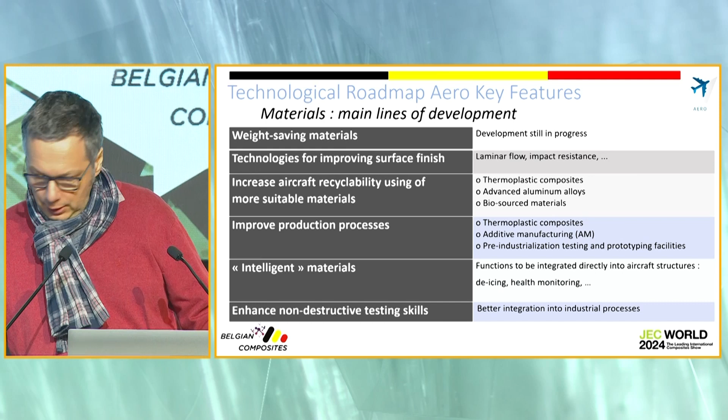The development of the following technologies will be taken into consideration. This list is non-exhaustive. First one, thermoplastic composites.

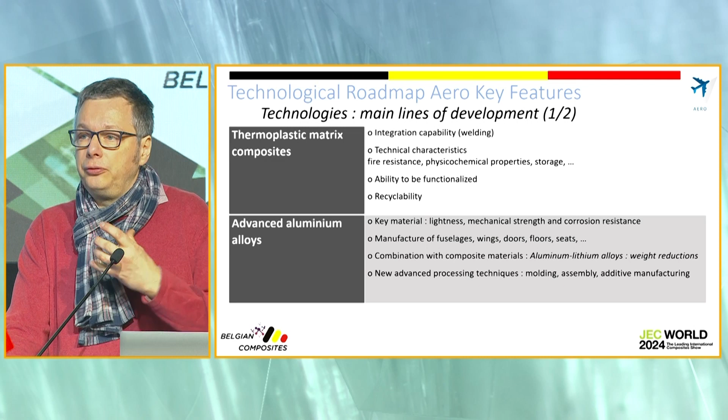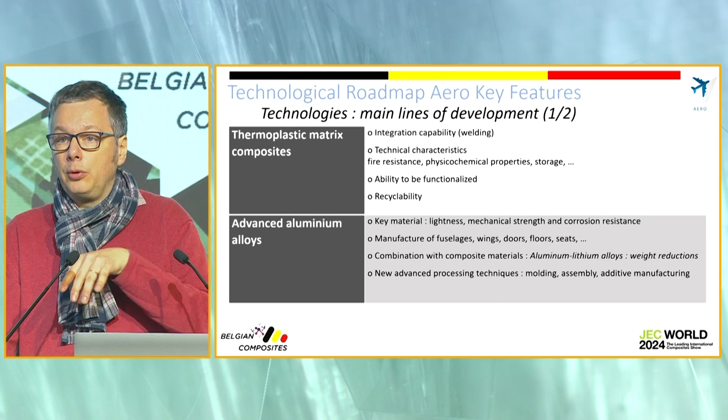The use of thermoplastic composites in the new generation aircraft should offer the same durability and strength as aluminum, while reducing the recurring cost of fuselage compared with the use of conventional thermoset composites. The key advantages of thermoplastic over thermoset composite are listed here, and further development should enable us to take advantage of the specific qualities of these materials and spread them more widely in the aircraft of the future.

Second, advanced alloys, lightweight, corrosion resistance, and mechanical strength appear to be a key material in the aerospace industry. New advanced processing techniques will also help meet the needs of the next generation of aircraft.

The last one is additive manufacturing. In the aerospace sector, additive manufacturing processes can help meet several industrial challenges. However, the deployment of this technology is slower than initially anticipated, so further development will be needed to reduce the limiting factors of additive manufacturing.

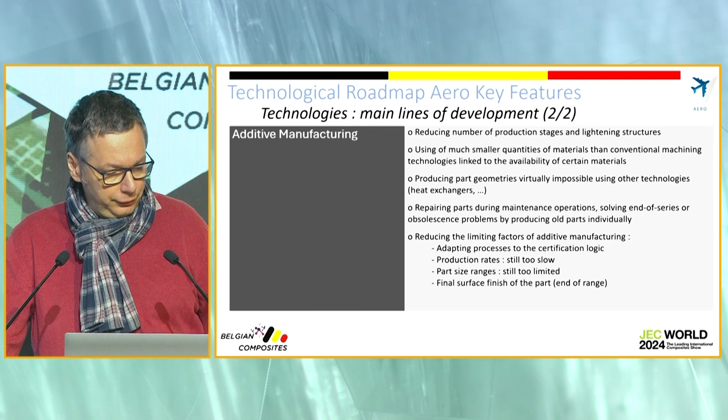I would like to speak about the WINGS project. WINGS is a partnership innovation technological project. 21 partners have joined the R&D effort around the ecological and digital transition to actively contribute to the European Green Deal. Work packages 1, 2, and 4 are about the roadmap.

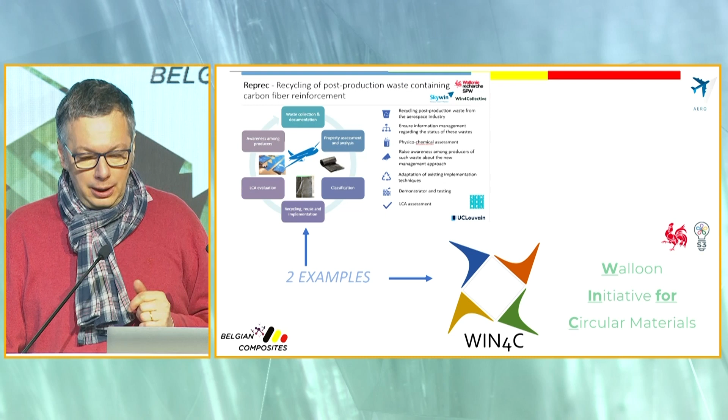Finally, I want to speak briefly about two current projects, Win4C and REPREC, which you see here. I'll stay for further information at the Skywin stand. Thank you.

Thank you very much, Stefan and Jan, for this introduction to the Belgian ecosystem. We now come to the main block of the presentation of the Belgian on Stage session. For this, I have to call on stage 7 people.

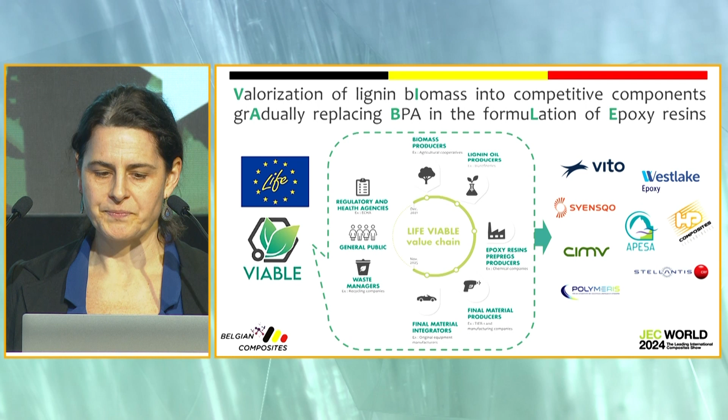It's a growing market, and we see a need for more sustainable products, because the current bisphenol used in these epoxies is derived from fossil resources. It's a big production globally, up to 10 million tons, and an essential component in this formulation because you need the strength in these materials. But there are some regulatory and health issues related to it for specific applications, so to be ahead of it, we are looking into replacements for bisphenol which are also safer, next to bio-based, resulting in a lower footprint.

So the challenge is to make it more sustainable. That's why we look to bio-based materials, and also safer alternatives.

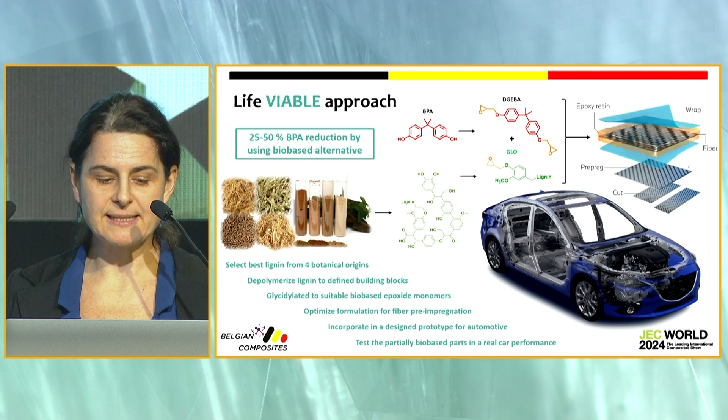The lignin is then depolymerized to make it a more handleable chemical, because you need a defined chemical to introduce into these epoxies. Then a modification is done to introduce it into the epoxy resin, which is further formulated into a pre-preg and then into a prototype for automotive.

You can see the picture on the right side, where this is being developed for two types of components: one structural and one aesthetic.

How do we do this, making this bisphenol substitute? We look to lignin as a component, and we developed it from lab to pilot scale to be able to deliver enough material, because the final aim of this project is to deliver up to 300 kilos of epoxy resins. If that works, we have a validation at the pilot level.

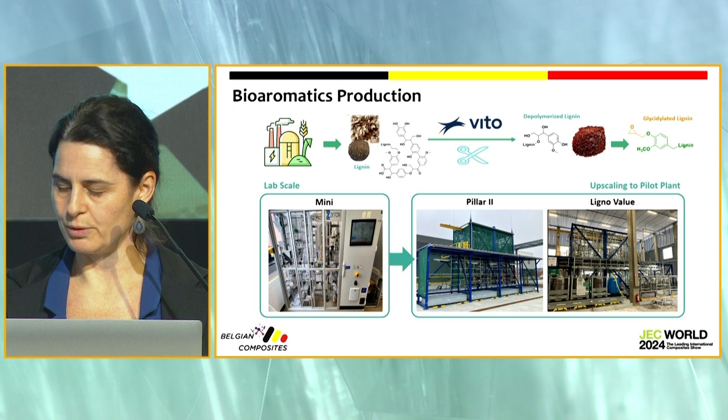That could be the go-ahead to move into bigger demo production. So we started from lab and moved into pilot scale, where we have two units able to produce up to a kilo per hour of this depolymerized lignin, which is then further modified to be used as a bisphenol replacement.

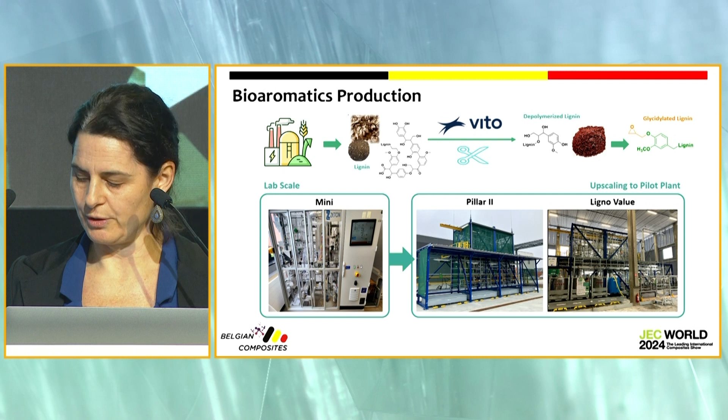The future perspective and potential of our development: we are currently delivering the replacement to our partners who are formulating it into materials, and this is how we gradually build it over the value chain.

So is it a bio-based alternative that's economically viable as well? Is it available, meaning can you rely on different providers? Is the alternative safer? That's also part of our LIFE project, to really look into the toxicity aspects.

Is the upscaling of the process reliable and reproducible? Can we deliver quantities which are okay in terms of time? And does it not affect the material performance? Because in the end, that's what you want - a replacement which ensures that the performance of your material stays the same. Thank you very much.

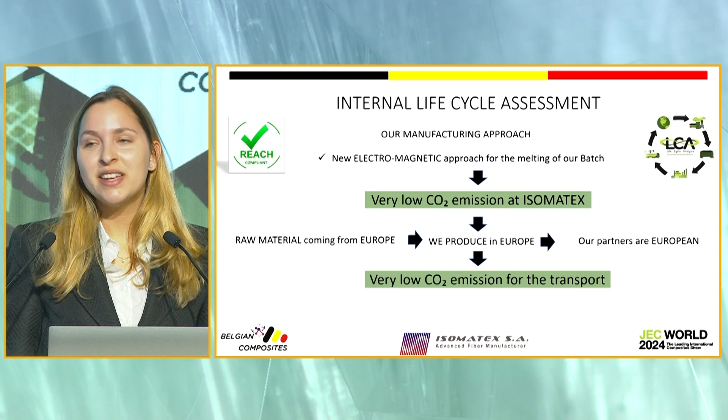Due to the fact that our industry and factory are quite modern, we made the choice at a very early stage to choose sustainable and renewable energy as a key aspect of the creation of our company. So we have 100% control of our LCA internally, which I'm really proud of. We made some different approaches in terms of our manufacturing process, firstly by choosing electromagnetism to heat up our furnaces, but also the fact that all our raw materials come from Europe, more precisely Belgium and Germany. We are a monosite, so everything is located in Belgium, near Namur. We have our R&D, production, quality lab, etc.

Our partners are also European, because we are not only producing bobbins, but also woven fabrics, semi-finished products, pre-preg, woven fabrics, hybrids, needle punch felt, etc. So we have a large list of European subcontractors that we've trusted for more than a decade or so. These aspects are obviously chosen for a reason: to reduce CO2 emissions from transport and be as green as possible.

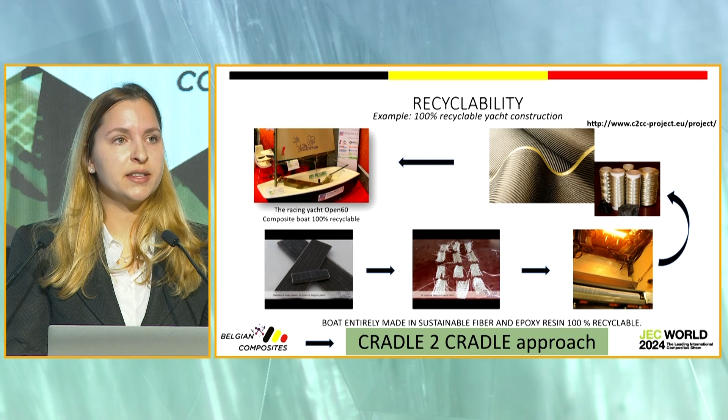To showcase the recyclability of our fiber, I chose to present an interesting project we did two or three years ago: the recycling of a boat that was displayed at JEC a few years ago, and now is not seeable anymore because we have recycled it entirely. We now really control the process of recyclability in-house, which is a very important aspect of our manufacturing approach. We do solvolysis and pyrolysis, meaning we put the fiber back in our oven. We can do that only because we have a very strict quality control process throughout the entire life of the manufacturing process. We are able to do that because we control everything.

Obviously, we are an aerospace grade fiber, so we are in aerospace. But not only that - we are also in naval and marine industries, sports, ballistics, defense, safety, mobility, and renewable energy. All these applications are really made to enhance the security of all users, from a car to a plane, to a helicopter, to a yacht, etc.

So I would like to invite you to continue this conversation with me if you have any questions. Our booth is located in Hall 5, M108. This is the number of the booth, and I will be very happy to meet you there. Thank you very much.

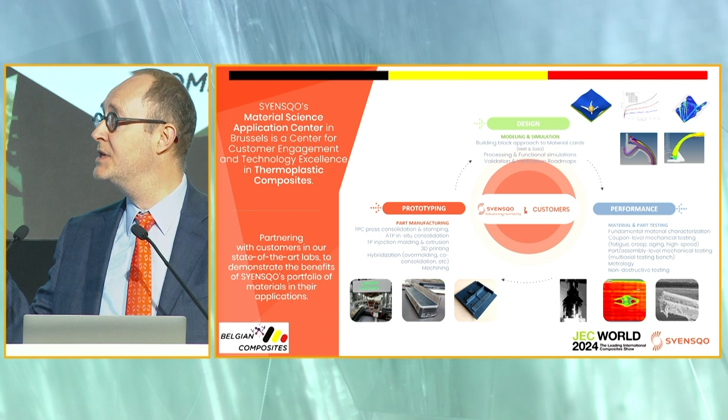Within the thermoplastic composite platform, I'm leading an R&D team called MSAC, which stands for Material Science Application Center. It's based in Brussels, in the center of Europe, and has a dual purpose of being both a customer engagement center and a center of technology excellence in thermoplastic composites.

Being a customer engagement center means we are not working behind closed doors. We want to have open access to our labs and capabilities for our customers. We want designers and material engineers to come and experiment with us on our equipment, or leverage our materials to develop new products.

The second pillar is called performance, where we do a lot of testing, both fundamental at the specimen level with tensile bars, for instance, to understand the behavior of the materials, but also part testing, so assemblies, where we can test complex parts at a big scale.

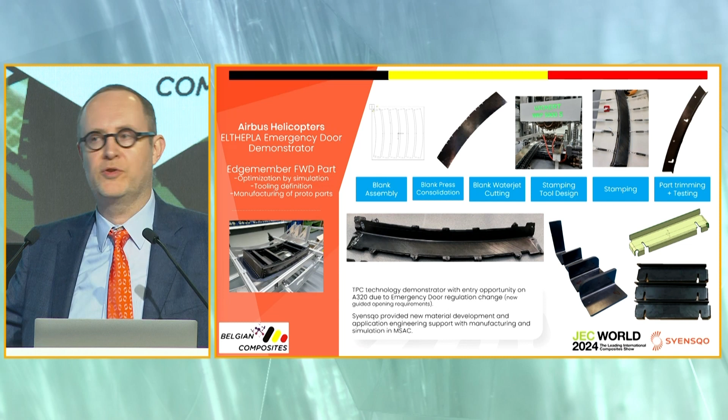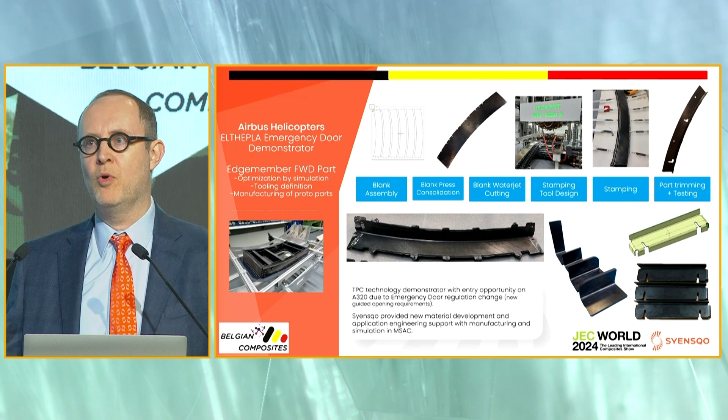What we did within MSAC was first run a lot of simulation to define the tooling to achieve a zero defect part, predicting wrinkles and every kind of defect you can have when processing our thermoplastic composite, in this case APC material. Based on this simulation, we defined the tooling and worked with a company in Belgium to get the actual physical tools. Those tools were then used in MSAC, still in Brussels, to manufacture the structural members, which were machined at Jet Techniques in Belgium and then shipped to Airbus for assembly of prototype doors.

You can see a small picture on the left side of one of the doors that was assembled. If you're interested to see it and touch it, it's also shown at the Syensqo booth in Hall 5. It was a very interesting project in the sense that all the pillars within MSAC aligned to deliver on the final goal, and it's a nice experience to be able to feel the parts at the end of the whole process.

The second project is called Compost. It's sponsored by the Brussels region, and we have several partners, some of whom are here today: the Vrije Universiteit in Brussels, Université Libre de Bruxelles, and UC Louvain as academic partners. We are sponsored, as I said, by Innoviris, the Brussels region.

This project was born from a kind of strange feeling. We were unsatisfied with the answer we provided to our customers around recyclability. What are you doing with your waste? The tape that you waste, maybe the scraps around the blanks after machining, what are you doing with them? The answer was always, well, you can compound them and get a nice engineering compound. But we never did it ourselves. We worked with partners and so on. We knew it could be done.

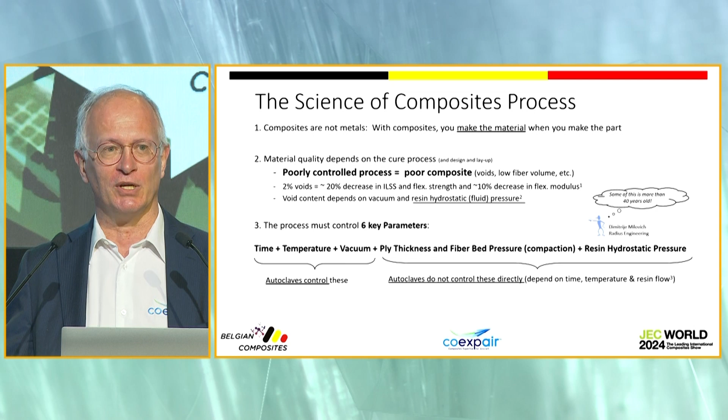The 6 key parameters Dimitrije likes to remind us of: time, temperature, and vacuum. The autoclave controls these parameters. But the other parameters, the ply thickness, really what will be the thickness of your part, the fiber bed pressure, the pressure on the fiber, on the laminate, and the resin hydrostatic pressure, the pressure in the resin, have to be controlled independently. And that does not work in an autoclave, and it will never work.

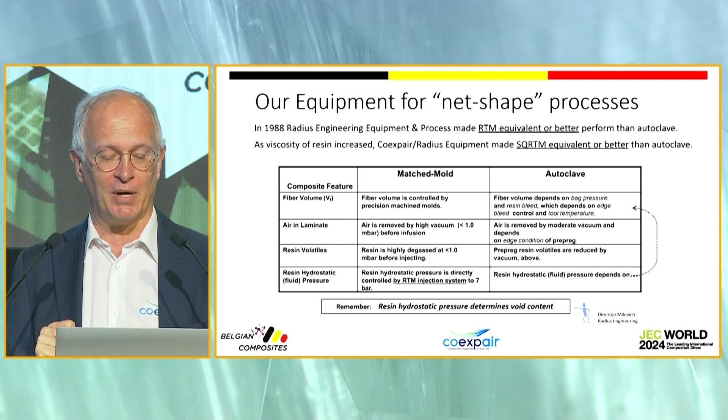So we went together to net shape process. We are in the RTM business, or SQRTM, not because we are fond of RTM, but because we want to be in control of the key parameters of the process. With a closed mold, the fiber bed pressure is controlled by the pressure of the press. The volume fraction is directly controlled because you have a 2-side mold, so the gap and the thickness of the part is frozen. The resin volatile, we can highly degas the resin and we can control the vacuum in the mold. So, compared to autoclave, we want to be in control of the key parameters that the scientists say you have to control if you want to make a good composite part.

And from these basics, we developed the right equipment to do it. That's why 30 years ago, Dimitrije and Radius Engineering invented a piston to control the pressure on the laminate and to inject resin, not a pressure pot.

And behind the science of the process, there is the science of the equipment. Today, we are the largest supplier of RTM equipment to the aerospace business, with hundreds of equipment in production only in aerospace for highly intensive production.

As an example, we propose mold in aluminum for high production rate. Why can we propose that? Because we manage the CTE mismatch between aluminum and carbon fiber.

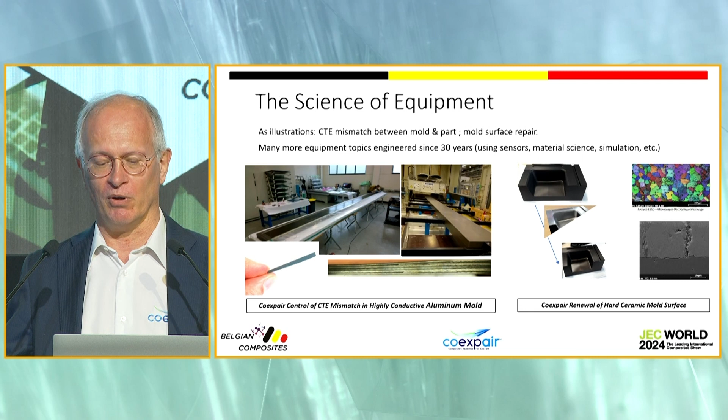And the durability, you need to repair your mold. I just illustrate here, you have mold samples. We remove the material, the surface treatment, and we put it back. It's hard anodization. So we have solutions not only to provide very large mold in aluminum, but also to repair and provide maintenance. And we work with universities for 15 years, understanding what is cracks in anodization, what is the microscopic structure.

So all our equipment is based on science. We want to know every detail. What do we do with that?

A first game changer, the A320 RTM spoiler. Spirit Aerosystem contracted us to develop a new version of the air brakes of the 320. There are 10 air brakes per aircraft. At 60 aircraft per month, it makes 600 parts per month. It was moved to Malaysia in 2006, from Scotland to Malaysia to cut the cost.

Spirit came to us 5 years ago. We imagined a new solution, a new architecture, and together we raised the technology readiness level and the manufacturing readiness level in our shop at Coexpair. It's dedicated to that. We don't do serial production, but we mature the technology and the manufacturing at the same time. So in less than 1 year, we proposed the spoiler, we developed the spoiler.

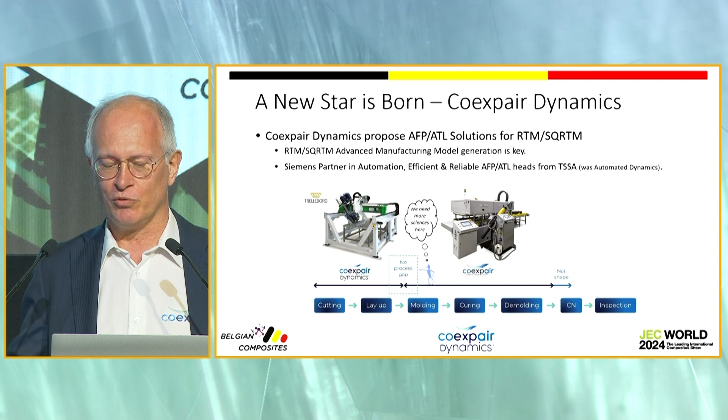So you're welcome to come to our booth, and I will be very happy to answer your questions.

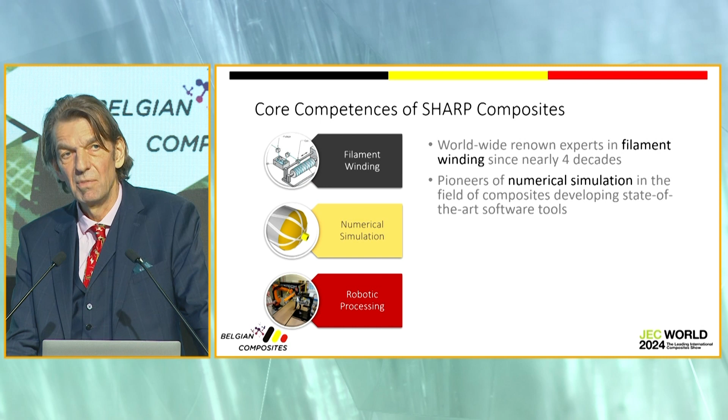It's what we've done for four decades. Numerical simulation is a key element of the technology to really be able to assess the performance of the tanks, and obviously also robotic production equipment.

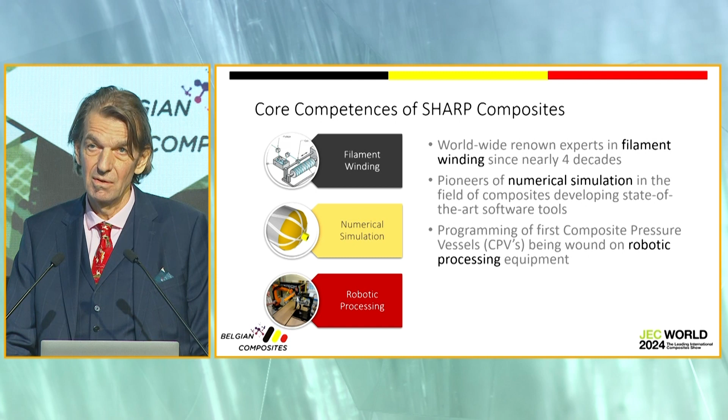Producing those tanks really requires high productivity to fulfill the requirements of the automotive industry, and we're extremely well connected in the network of hydrogen worldwide.

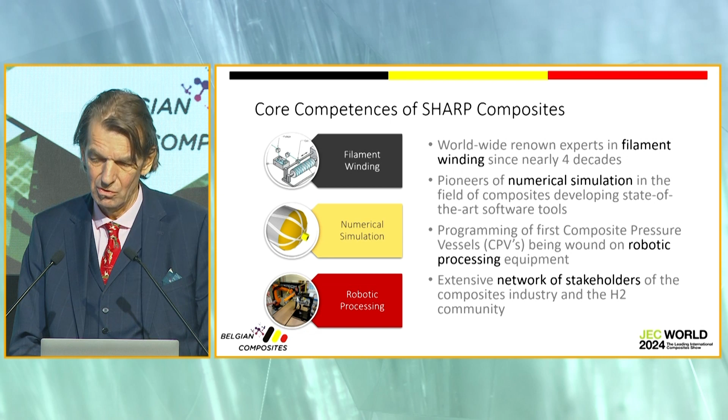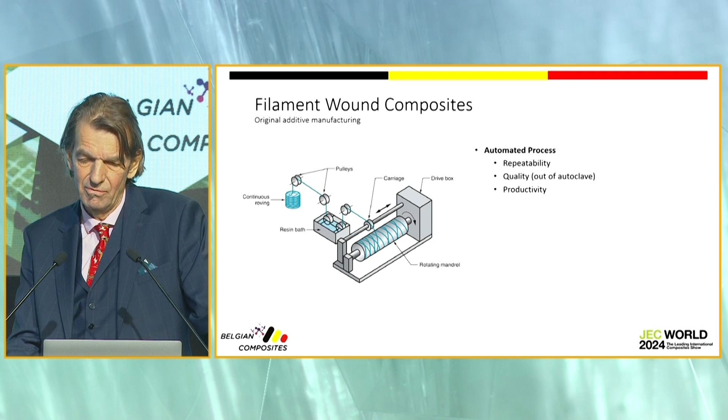Just a few words about filament winding. This is what I did basically all my life. First of all, it's an automated process, which means repeatable quality. Out of autoclave, it's a very simple process, and for composites you get extremely high productivity of very highly structurally loaded parts. It's an additive manufacturing process, and I think this is extremely important to know.

Maybe you heard that BMW stopped production of the i3 and i8 cars, simply because they were too expensive. On those cars, around 35 to 40% of the carbon fiber material was actually scrap. This we don't have in filament winding, where you can use the carbon fiber until the last gram of the spool.

Also, in those tanks, there's no finishing required to deliver the product. Filament winding allows use of materials in their cheapest form. The spools we use are those coming straight out of the carbon fiber factories, and the resins as well are basic, not very sophisticated, and relatively inexpensive. Last but not least, in filament winding you can use the directional properties of the fibers, putting them in the orientation needed for your application.

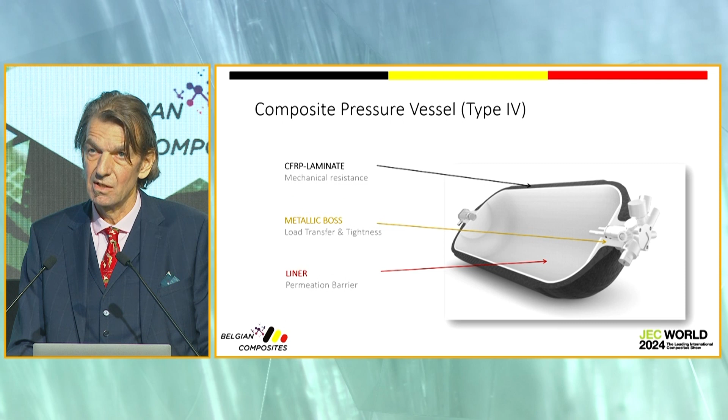Composite pressure vessel, for those who want to have a look inside - there are many on display. Key functionality is definitely the liner, and I'll have a few slides on liner production. Then the composite, some metal pieces for holding the valve and doing the load transfer between the composite and the valve and piping, and obviously the carbon fiber reinforcement.

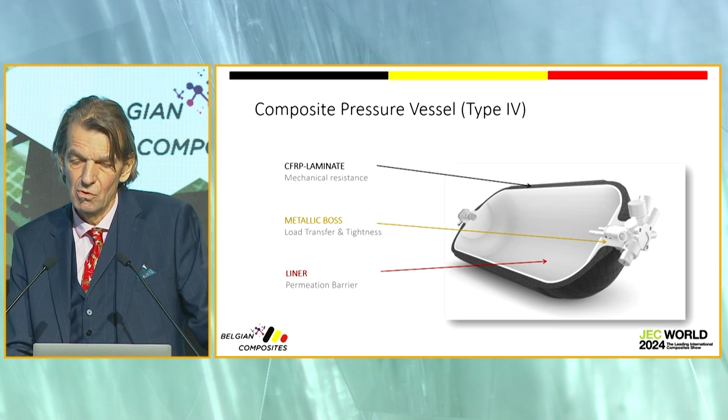If you look at this, it's extremely simple. What's more complicated, besides the windings, is actually manufacturing the mold. There we team up with AMS Robotics, who have very innovative liner manufacturing methods, also used by the automotive industry worldwide, to manufacture the liner - the inside bladder of the tank.

It's a patented technology, extremely accurate in controlling the process, and also suitable for a variety of polymers which can be used as liner materials. And obviously you're also able to integrate the metallic inserts.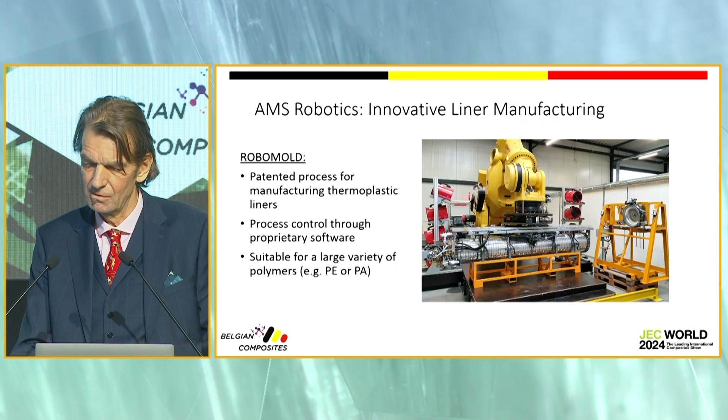Furthermore, AMS Robotics offers a turnkey solution for composite overwrapped pressure vessel production. You can see a floor plan, and I'm sure Johan Potargent is here as well - you can talk to him at the Belgian pavilion, and he'll be happy to answer all questions regarding manufacturing of pressure vessels for hydrogen. I see I have half a minute left, and I'd like to thank you all for attending this presentation.

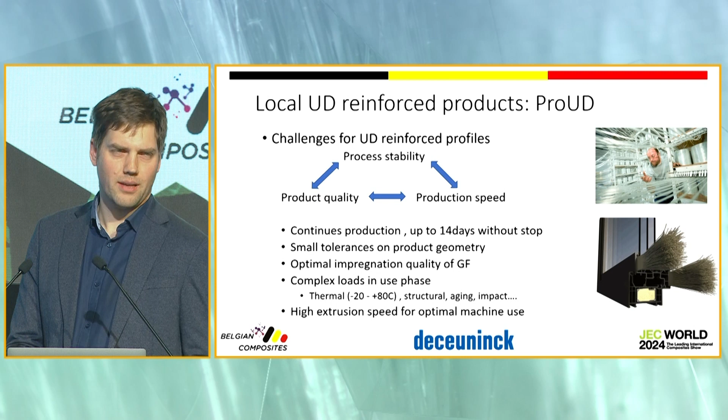And you cannot imagine how complex the load cases are for a window profile. On the first hand, you have the temperature loading: in the winter, -20, and in the summer, even up to +80 degrees. But also you need to keep up the structural integrity, supporting triple glazing windows, but also a large wind load. Storms often occur, and of course your window cannot fail.

After that, you also have the aging of the PVC and of the profile, and we give a 20 years guarantee. It even goes up to 40 years in installation. And at the end, you also need to have a good impact stability of the profile.

So why would you use these glass fiber reinforced profiles? Well, the first thing is that you have a better thermal efficiency, because you do not have large chambers inside, since there is no steel needed to have the stiffness of the window profile. So more internal chambers mean a better thermal efficiency on insulation.

On the other hand, you also have the side of the window manufacturer, who does not have to have a stock of steel profiles which he has to insert into the window, the PVC profile. So this leads for him to a more efficient and simpler process. And a big benefit of these profiles is that they are easily recyclable.

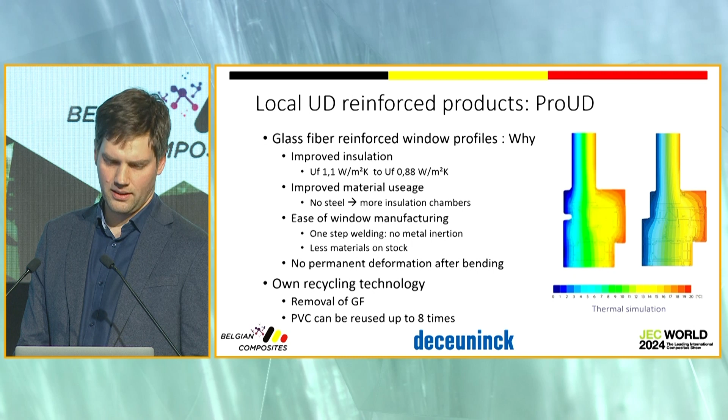At Deceuninck, we have developed our own recycling line to recycle PVC profiles, but also to cope with the glass fiber which is in these PVC profiles. And we have proven that we can recycle them up to 8 times.

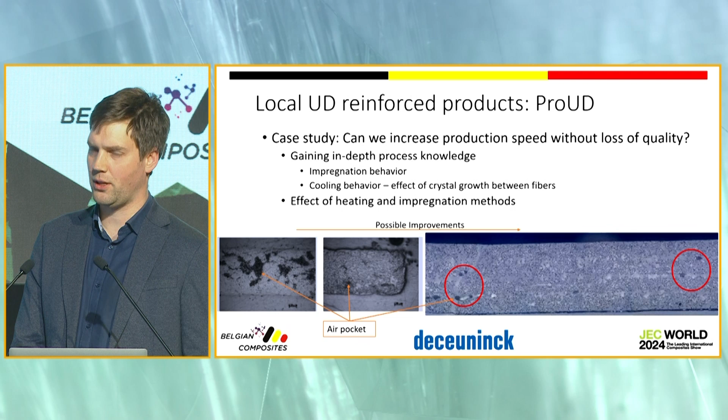And of course, we all know air pockets mean low quality. So if we do not control the process well enough, we end up with a lot of air pockets. But if we control the process, we can go to almost no air pockets. 0 air pockets is almost impossible in our case, but this limited amount of air pockets is more than enough for us.

We also implemented a lot of numerical simulation in predicting, first off, of course, the cooling behavior of these profiles. But linked to the cooling, you have the stress buildup because you have different CTEs, glass fiber versus the matrix versus the PVC, which tends to warp the profile. So we, of course, need to tackle this.

And it's very important that we know the effect of the glass fiber tape inside the profile. A little bit of repositioning the tape can lead to a completely different warpage of the profile.

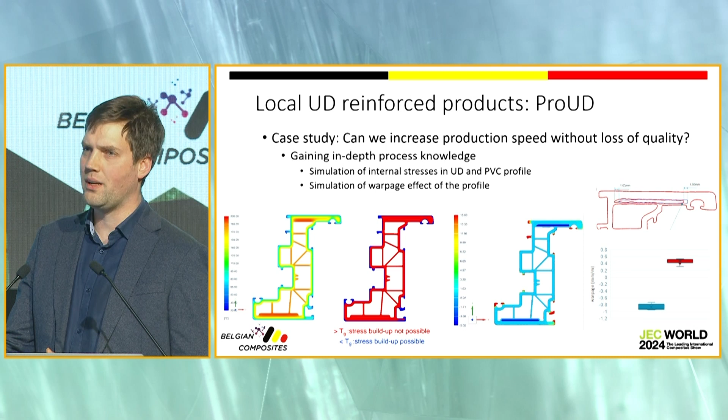As an example, on this complex profile, only a movement of 1 millimeter of the tape immediately gives more than 2 millimeter different warpage in another direction, which is of course not allowed.

So at the end, we can say that via a lab scale and a pilot scale line we built together with the partners in this project, we were able to learn a lot more about the process of the UD reinforcement and the window profiles.

And so we were able to increase the line speed by 20%, and of course also with increased production stability. Furthermore, we increased the stiffness by 10%, which is also very important if you want to go to larger window frames.

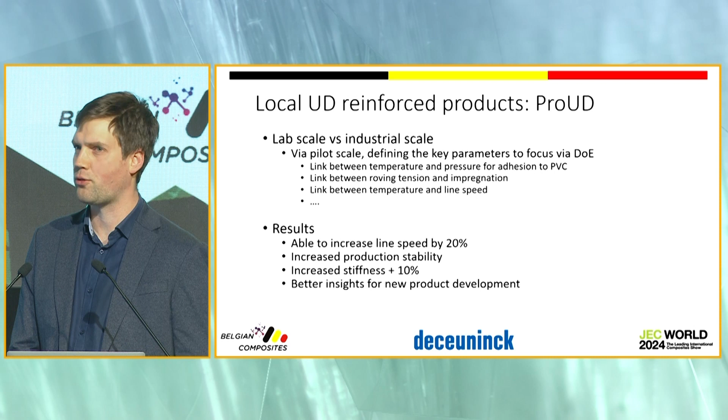And at the end, we can say that we now have better insight to develop new product ranges, which is of course what we want to do in the future. Thank you.

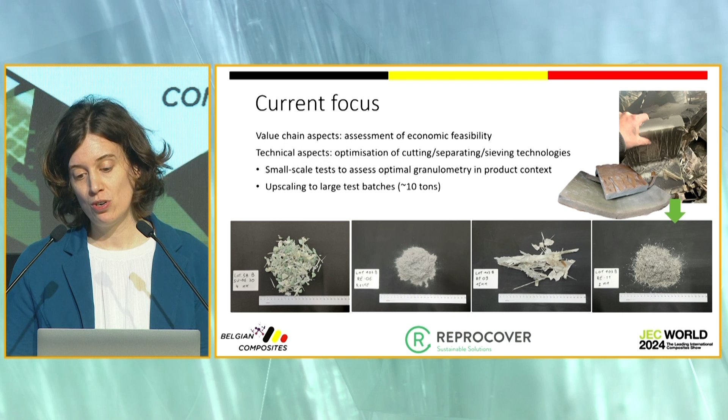So this is where we are now. I would also like to mention where we will go next, because when we talk about recycling, we would like to have as high as possible material value in our end products. We are very much aware that there are nice technologies like solvolysis and pyrolysis, or a combination of those technologies, that in the future will become more and more feasible. They will also be more and more available, and we still need some research on those.

So we will start, if we are funded - we are still waiting for the results, but hopefully we will start in the very near future - a project on pyrolysis and solvolysis to look at long-term solutions where we will be able to handle all these materials that will become available in an efficient way. And this we will do together with the University of Leuven and with Vito. So feel free to pass by our booth, and I would be happy to discuss this further with you. Thank you for your attention.